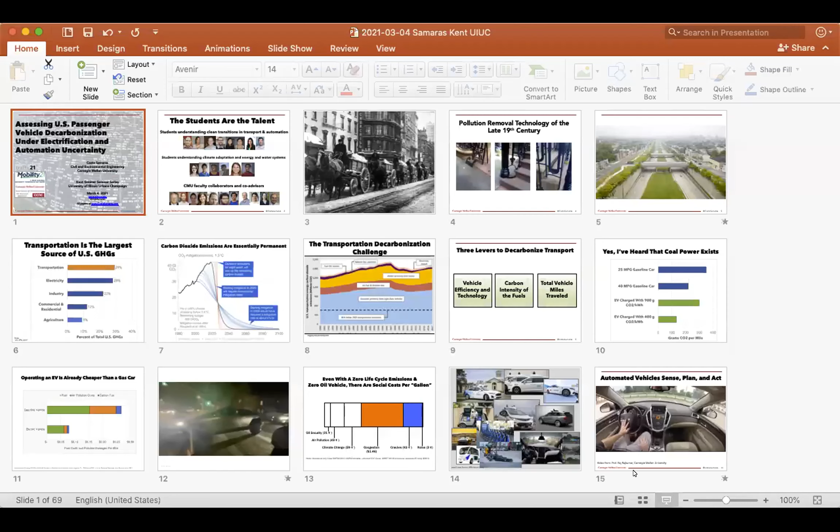So today we have 40 minutes, and I'm going to make sure that we have plenty of time for questions. I want to get through a bunch of topics because I want your feedback. We're going to talk about our work on transportation decarbonization and work that's been published. We're also going to talk about work that is very much in progress at the end of this, so I want your feedback on how things are going and what we can do better.

None of this would be possible without the amazing work of our graduate and undergraduate students that I get to work with, as well as our faculty collaborators. I work in two main areas. One is understanding the transition to a decarbonized economy in both the transportation and electric sector, and I have a great group of students I work with on that. The second focus area, which I'm not talking about today, is climate resilience for infrastructure. That's a super important topic, and I know it's important to faculty and students at UIUC, so I'd be happy to be connected offline about our work in that space.

Now, remember, transportation has evolved before, starting in recent history at the turn of the 20th century with horsepower, and with horsepower came horse manure. If you look around Chicago, New York, Boston, Philadelphia, Pittsburgh, or DC, you will see boot scrapers—basically pollution control devices—removing horse manure from your shoes, built into the built environment. So we traded this for engines that puffed leaded, carbon dioxide laden gas.

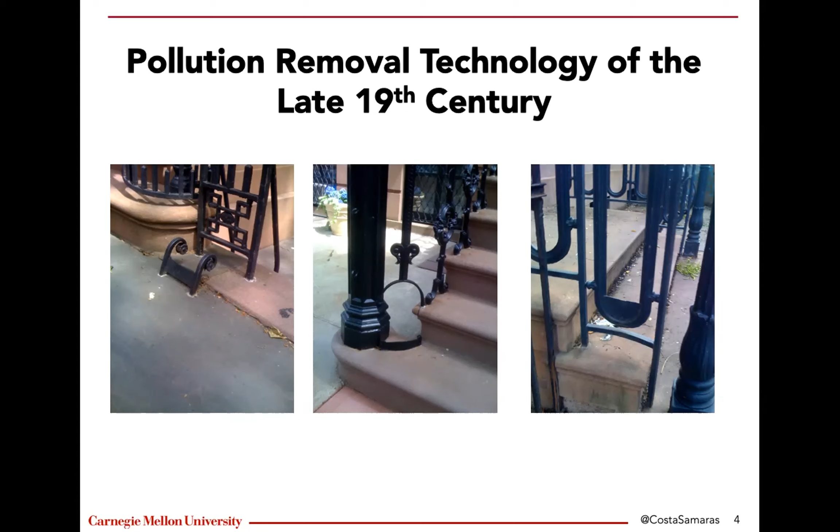We solved one problem and introduced a much bigger problem. As civil and environmental engineers, we really have to grapple with our legacy of racism in infrastructure. This is what we replaced horse and buggies with: highways that cut through neighborhoods, highways that disproportionately affected communities of color. We live with this legacy today. In this transition, you have to, as students, ensure that the next transition does not look like this one.

Transportation is a problem in greenhouse gas emissions. It's now our biggest problem—the largest source of greenhouse gas emissions in the United States. The important thing that many of you know, but I don't think the general public grasps yet, is that carbon dioxide emissions are essentially permanent. When a smokestack generating coal power turns off, the sulfur dioxide that was emitted starts to fall out of the atmosphere in a relatively short amount of time. The carbon dioxide generated from that coal power plant—unlike the air pollutants we'd be breathing in causing respiratory distress, like sulfur dioxide and particulate matter—as a greenhouse gas, stays in the atmosphere for hundreds to thousands of years or longer.

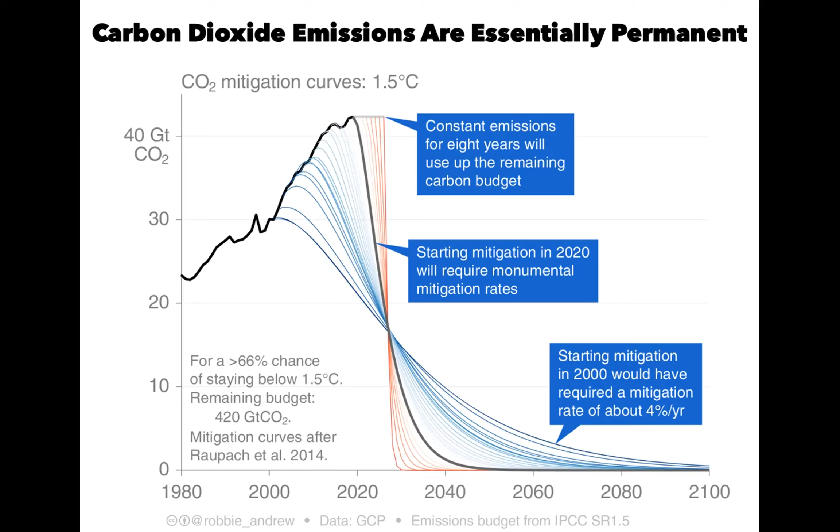Now, 80% below 2005 is not enough. It has to be down to zero. So we have to figure out how to decarbonize all of this activity.

Well, we have three things that we can do: change the technology and the vehicle efficiency, change the carbon intensity of the fuels, or change our total distance traveled, or some combination of these.

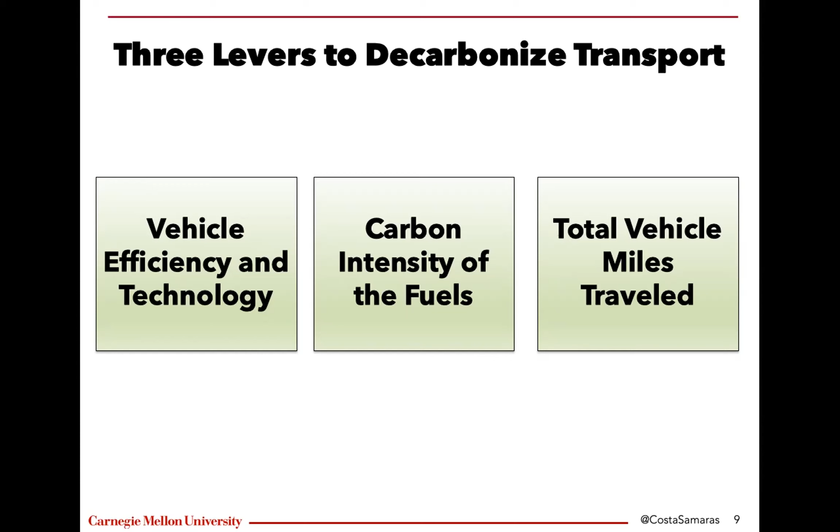Now, we've been working on vehicle electrification for a long time, and typically we'll get the response from a general audience, well, what about coal, right? So yes, coal exists. And if we are charging with 900 grams of CO2 per kilowatt hour electricity, that's kind of a modern coal plant, we are still better than a car that gets 25 miles per gallon.

Now, we're not charging with 900 grams of CO2 per kilowatt hour electricity anymore. The current US average grid is closer to 400, and better in some places, worse in other places. We'll talk about that.

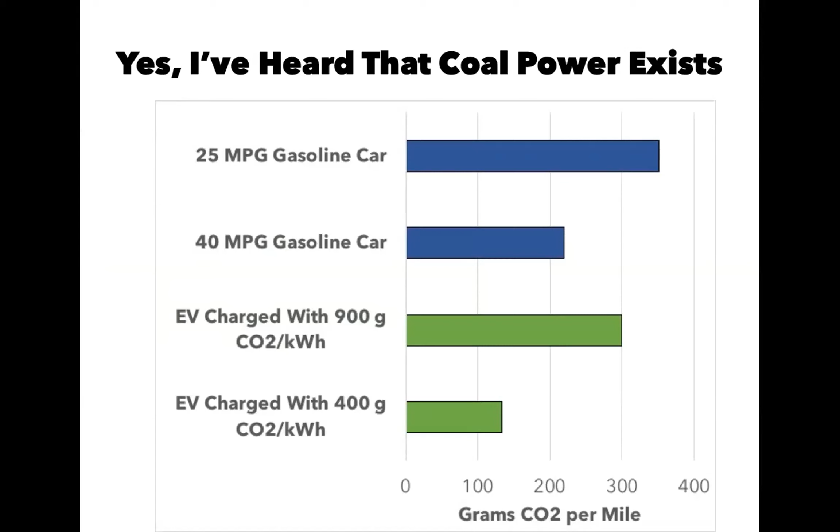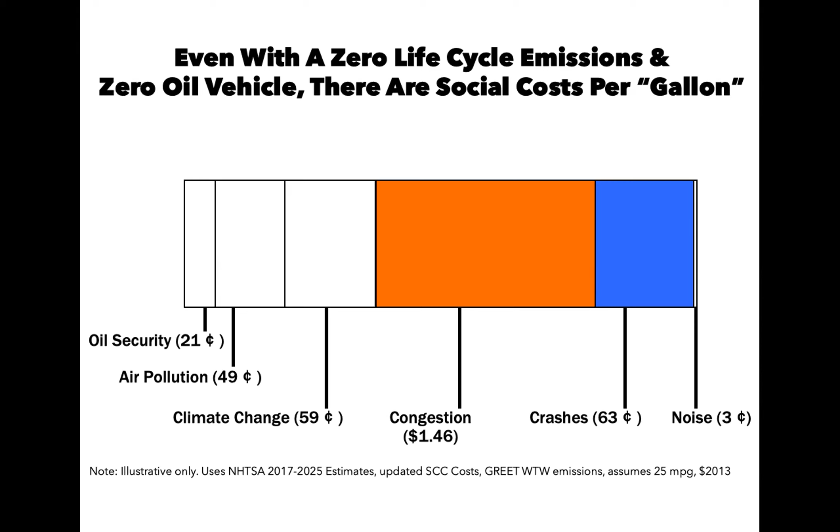So even if we had an electric vehicle charged on all renewable or low zero carbon electricity, we still have the big social damages of congestion, crashes, and noise that are generated from driving vehicles. So we have to think about reducing these and getting them to zero at the same time we're reducing our environmental externalities down to zero.

There are lots of new technologies on the horizon that potentially could help with crashes and congestion, namely the automation of vehicles, as well as the shift to micromobility and advanced public transit.

Automated vehicles are not for sale yet. This is Carnegie Mellon's automated vehicle from many years ago, and it does things that you would imagine that you'd see on videos for automated vehicles at UIUC or other places. You program it to where you want to go, and it goes where you want to go. And a vehicle like this can actually cross the country.

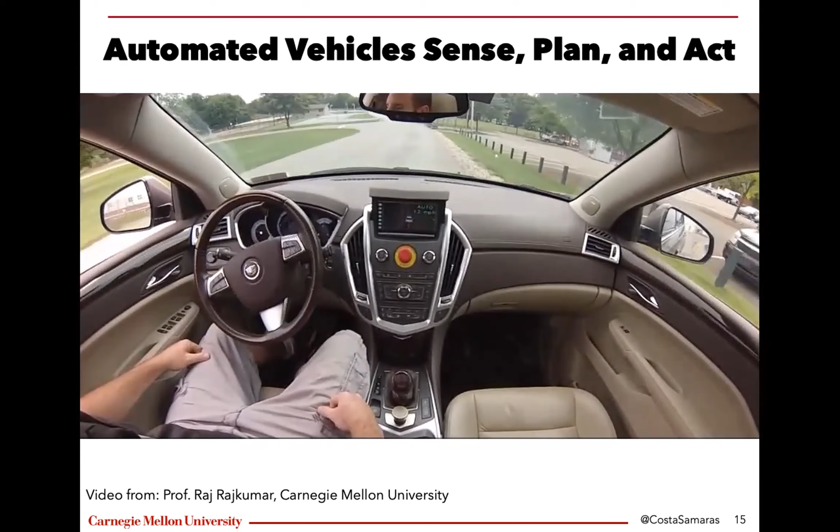with relative safety, as long as there's a person completely alert, ready to smash that big red button when something goes wrong. So these vehicles are not yet for sale, but are they going to be for sale this year? No. Next year, probably not. But maybe through the end of the decade, maybe the beginning of the following decade, we'll see how things go.

Eventually, these are going to start affecting energy use in a couple different ways, which we'll talk about. Now, just for safety's sake, if you have a Tesla, that's great. You do not own an automated vehicle, not at all. You have a partially automated vehicle, a level 2 automated vehicle, and please do not treat it otherwise, because the vehicles for sale right now require your full attention the entire time that you're driving them.

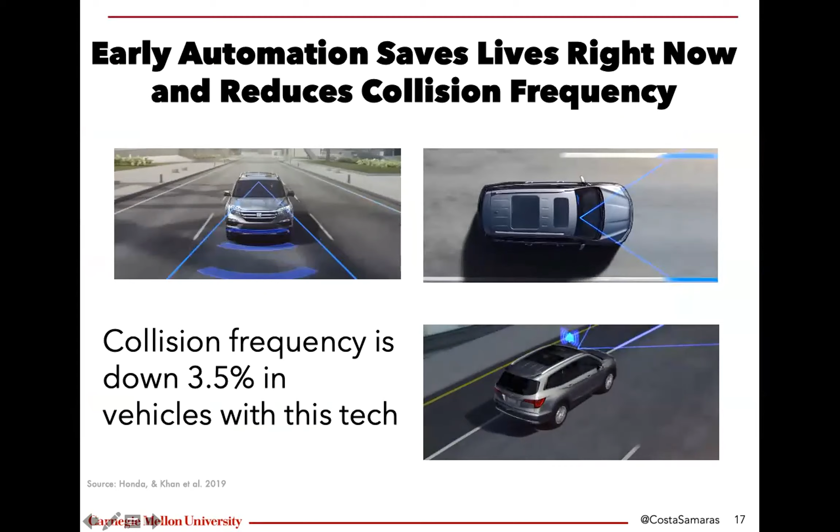But what they do enable is collision frequency and severity reductions with different technologies: lane departure warning with active lane keeping, crash avoidance with active braking, and blind spot monitoring with active avoidance. So Professor Corey Harper at Carnegie Mellon and us and others have published on how these early automated features can help save energy uses associated with crashes.

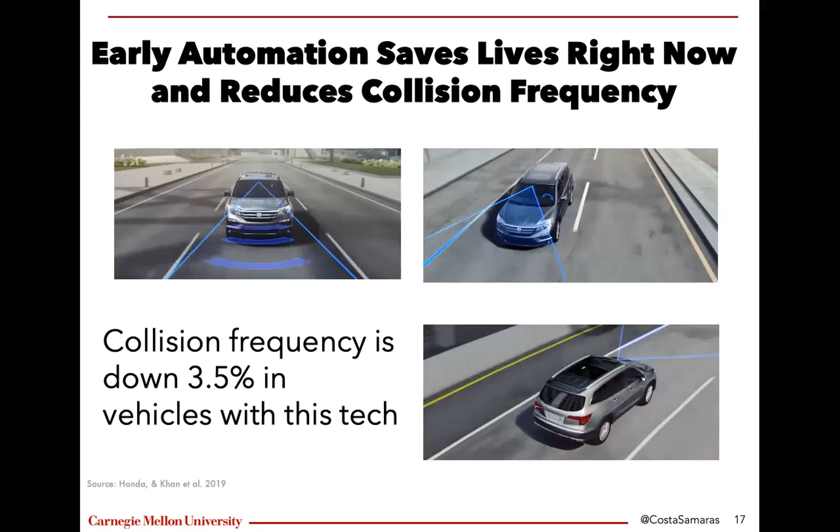Now, if you're going to go buy a vehicle, buy the cleanest you can, buy electric if you can, and please buy the safety package, because this is really instrumental in starting to bend the crash curve in vehicle driving.

Now, we have a whole bunch of work that's ongoing in this area. I'm going to just give the titles of what's happening and mention and show a couple of the students that have been working on this.

These are some of the factors that go into how we model the energy and environmental implications of a future transportation fleet. So how do people use these vehicles? How do they affect energy use? Are they going to be high density urban pods, or are you going to travel from UIUC to Chicago watching Netflix, or even better, traveling from UIUC to Indianapolis or Pittsburgh, kind of sleeping?

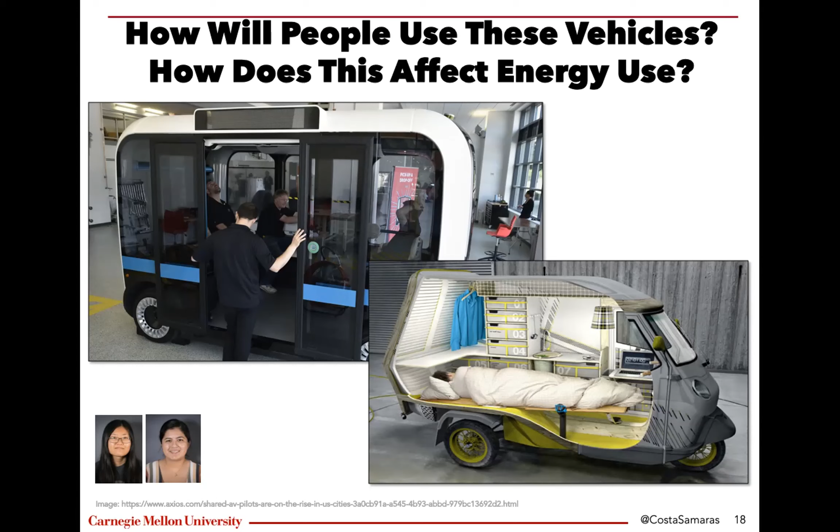These are different travel modes. They might extend the commute range if people are not having to drive, or they might enable kind of dense urban shareable networks. Will these cars be owned or will they be shared? Also super important, and how will they affect equity?

Will automated vehicles enable additional transit service through shuttles or purpose-shared automated vehicles to communities—this happens to be Pittsburgh—communities around cities that don't have as dense a network of transit as the urban core does. These are all things that our students are investigating.

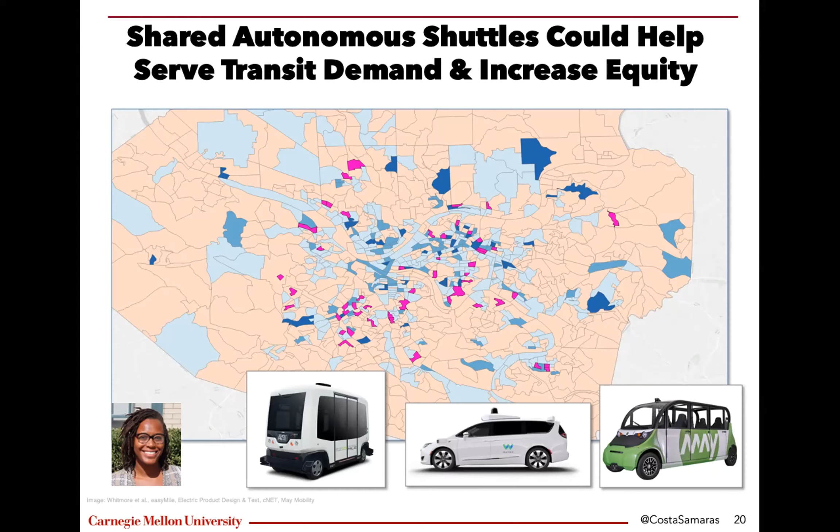When you look at this, vehicle efficiency and technology could get better as we electrify and as we automate. We and others have done papers on how early automation is going to improve the fuel economy of driving. But some of our colleagues have done papers on how automation might increase the total amount of energy use per mile if the sensors, cameras, and computing equipment start to erode the driving range of a traditional electric vehicle.

Now, the carbon intensity of the fuels—here we're talking just about electrification—so we're hoping that continues to go down, and we expect that it will. But the real big wild card here is the total vehicle miles traveled. How will automated vehicles affect total vehicle miles traveled in communities around the country and around the world? Really, we do not have an idea with this. We don't have a great sense of what this is going to look like. We can model it, but we won't know until this actually starts to roll out.

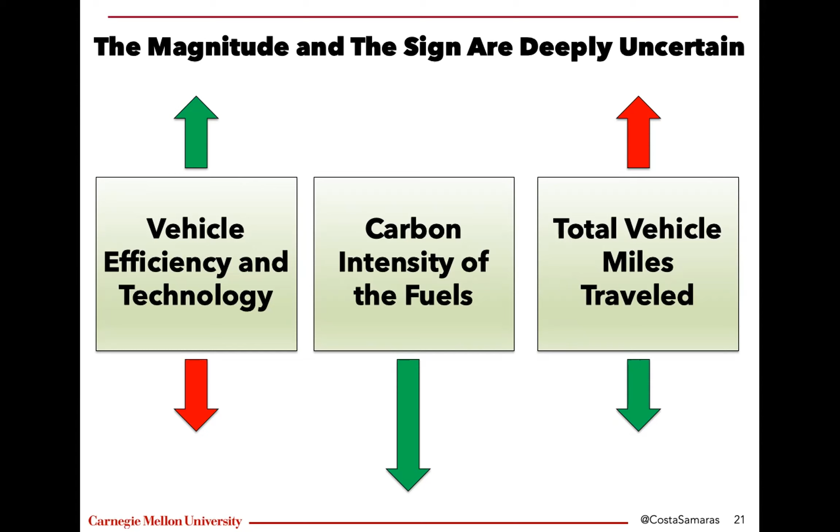So there's all this uncertainty around the future passenger transportation system that we would need to model in order to make some understanding and policy pronouncements about where we should go and what we should do next. We incorporate these and others into a robust decision model.

Now, robust decision making is a method that came out of the RAND Corporation and some of our mentors there. This slide is from Dr. Jordan Fischbach, but I like it because it tells us the difference between what we normally do, which is try to imagine a couple scenarios, and then under those scenarios, what are the policies and infrastructure that will get us to be successful under those specific scenarios. So that's a predict then act approach.

And that we don't think is good enough for something that is subject to such deep uncertainty like the future of transportation, because of all the factors that we've been talking about. So what a robust decision-making process does is basically model every proposed strategy and identify the vulnerabilities of that strategy. That strategy might be requiring electric vehicles by a certain date.

That strategy might be subsidizing automated vehicles in the dense urban core. The strategy might be some high pollution externality on fuels. Then we're identifying how well those strategies get us towards some threshold.

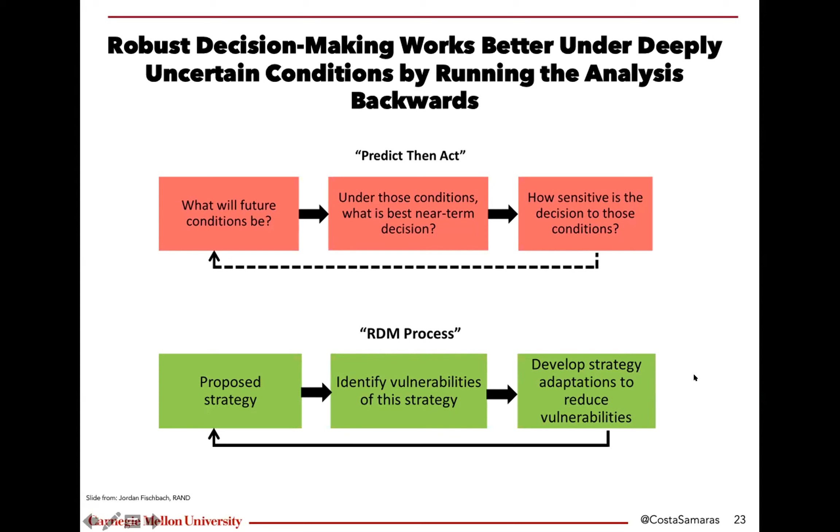Let me talk a little bit about what that means, and we'll get to some results. So in this first piece that we've done, our goal, our threshold here, is to reduce CO2 from the light duty vehicle sector by between 80 and 100%. That means that we have a CO2 threshold in 2050 of 250 million metric tons.

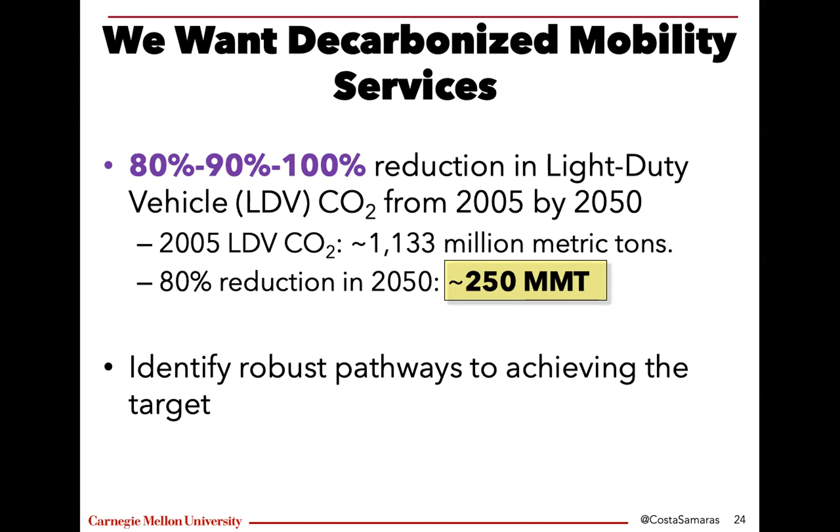So that's the goal in 2050 that we're trying to get to. Now, this is just the 2050 number. In this first paper, we were doing it annual through 2050. In the work we have ongoing, we're looking at an entire carbon budget. And there's a difference in strategy when you're trying to be 80% or 90% below a target in 2050 versus spending down an entire carbon budget. So I'm going to talk just about the annual number here.

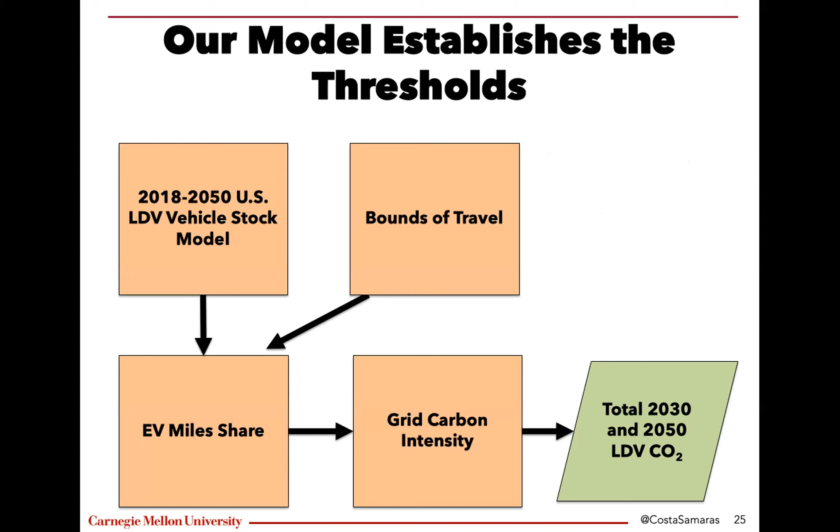The important thing here is that there are a whole bunch of correlated factors we need to make sure we're developing internally consistent pathways for. You probably aren't going to have a sample year where total vehicle sales are really, really high but the economy is in a recession, or where vehicle mile travel growth is really high when the economy is in recession, right? So we have to think about adjusting the scenarios to make sure the signs are at least aligned.

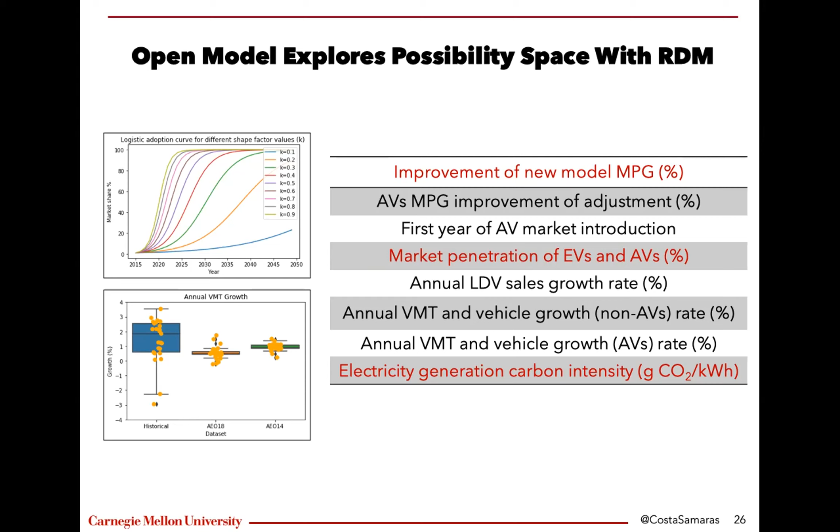And then we're modeling across the broad range of future improvements on AV adoption, year of AV market introduction, EV adoption, EV policy and sales restrictions, and how the grid changes. So we're trying to model all the different ways that might affect our outcome, which is CO2 in the transportation sector by 2050. So here's the kind of base case we can talk through.

And we're going from close to 0 electric miles now, a couple percent. As the electric sector moves away from 0—so maybe we do a really good job in decarbonization, but instead of getting down to 0, which is a very low number as our colleagues would say, now it's at 100. So 100 grams of CO2 per kilowatt hour is great, it's not 0 though. So at 100, we're going to need more than 90% electrified miles, right?

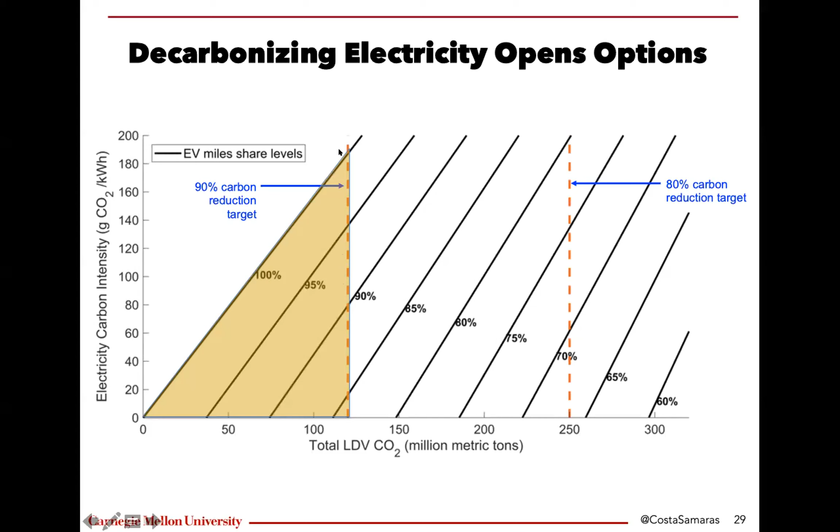And as we move all the way up to 200, now we're basically going to need very close to 100% electrified miles. Now this was under traditional projections of how far we travel.

And so this is where the automation piece starts to come into play. The way automation comes into our analysis is, number one, how far we travel. And number two, underlying all this, is how it affects the efficiency of vehicles. So here is how far we travel.

Now, you all are in transportation, and you'll be very familiar with VMT trends, vehicle mile travel trends, or vehicle distance traveled trends in the United States and around the world. And we travel a lot—3,000 billion miles in transportation annually in the United States, 3 trillion miles.

And what if automation starts to open up travel possibilities and induce additional demand that we haven't even thought about yet? And we do not put any policies in place to encourage dense development, as well as ride sharing or vehicle miles traveled fees, other ways that we might discourage the use of additional driving.

If we don't address this, and we go from 3,000 billion miles to 4,000 or 5,000 billion miles of total VMT per year, the amount of electric vehicles you need to still meet your target really goes up to 100% very fast. And that's also assuming our electricity sector is decarbonizing separately. Under a zero-carbon electricity sector, which is where we need to be, under a traditional model of travel, we're going to need, as I mentioned, 84% EV miles in the system.

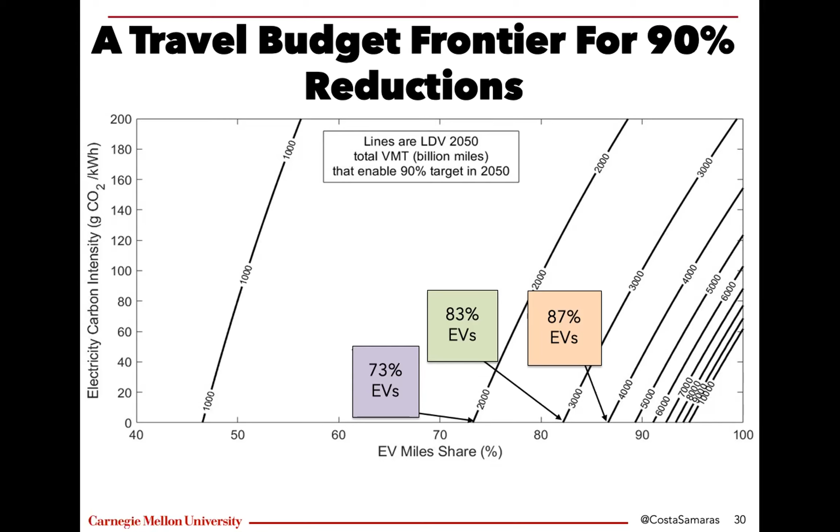So as we travel more, we'll need more electric vehicles and more electricity decarbonization. But as we potentially travel less, you need fewer. So the equation goes both ways: reductions in travel reduce the total number of EV miles you need in the fleet to meet a specific 90% target.

Now, what about changing load factors and encouraging sharing? Stuff that we definitely should be doing. Here's our current load factor, around 1.6 people per trip. If we're able to move that load factor above 2, towards 2.5, now all of a sudden we're able to approach our CO2 targets by having fewer EVs. That's good, and we should be doing that.

But the thing that really struck me about our results is, if you're able to get to 100% EVs with very, very low CO2, you're basically doubling or tripling the benefit of additional sharing. So we need to do all of this — we need sharing — but really, it makes intuitive sense. A largely decarbonized electric sector running most, if not all, EVs will have a big CO2 reduction relative to the status quo.

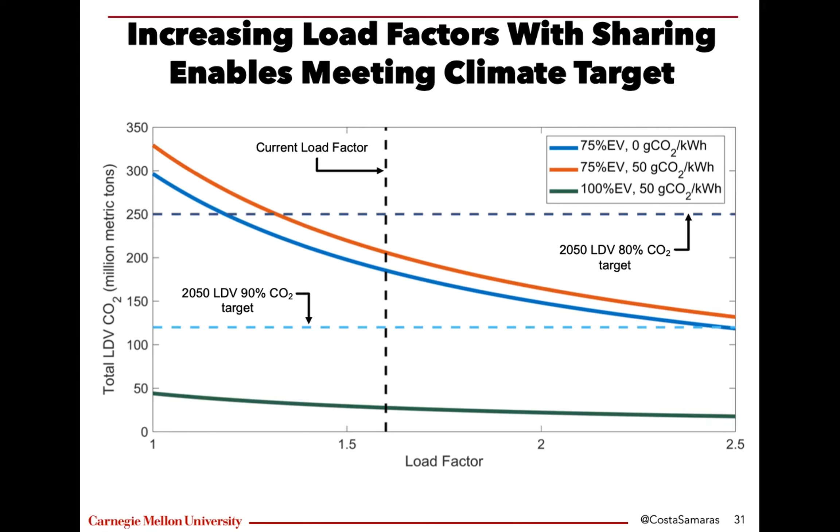Now, let's think about what our travel budget frontier could look like for enabling a very, very low-carbon passenger transport sector. So I mentioned that we do 3,000 billion miles, and two-thirds of our VMT are in urbanized areas.

Now, UIUC is probably an urbanized area. Outside of Pittsburgh is probably an urbanized area. There are urbanized areas, according to DOT, that may or may not look like what you'd think of as urbanized, but they're within an urbanized region. Still, if two-thirds of our VMT is within urbanized areas, we have opportunities to make considerable reductions through active transportation, public transportation, and micromobility.

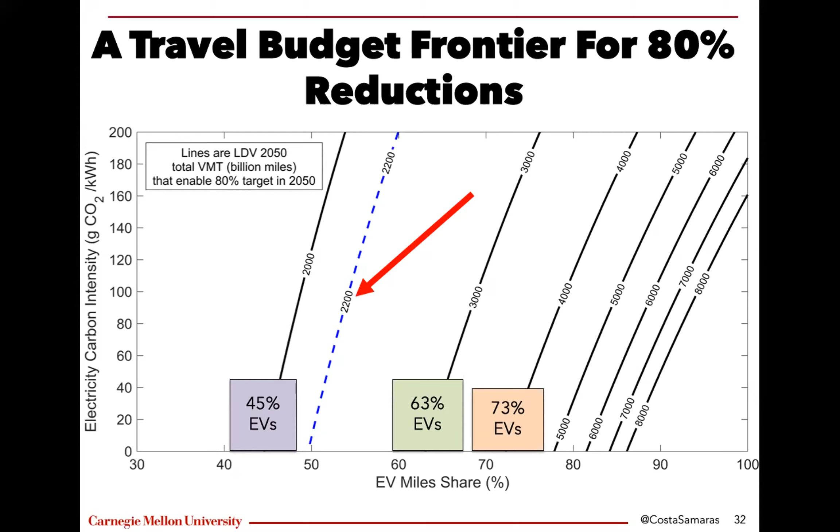Now, this is the scale we're dealing with here. To jump from 3,000 down to 2,200 or thereabout, this is all of the urban vehicle miles traveled in the 10 most populous states. So there is a chunk of VMT that can be reduced in these areas, which reduces the total number of EVs we'd need in the fleet to meet our decarbonization goals. Fewer VMT, fewer total EVs needed. More VMT, we need more EVs in the fleet to meet decarbonization goals.

Now, the problem is EVs and vehicles themselves are not phones — we don't throw these away every few years. People sell them, but then they enter the secondary market and are driven for many more years. The average age of a vehicle is 12 to 15 years, and the tail of this distribution can go into the 20s and even up to 30 years.

So we modeled a range of how the fleet would evolve given sales, exits, and fleet age, and also, not shown here, some work around what COVID did to auto sales. We found that if we wanted 100% electric vehicles in the United States, we would have had to sell only electric vehicles starting in the year 2020 — which would be impressive, because we'd need a time machine to go back and require that, then start selling only EVs.

So we will not age out the current gasoline fleet by 2050 without some additional policy. A vehicle sold in 2021 has a decent chance of being on the road in 2041, maybe even 2050. However, we could still meet our bounds of decarbonization — a lower bound of 40% electric to an upper bound of 60 to 80% electric — even if we did limited policy and waited until the early 2030s to require only EVs.

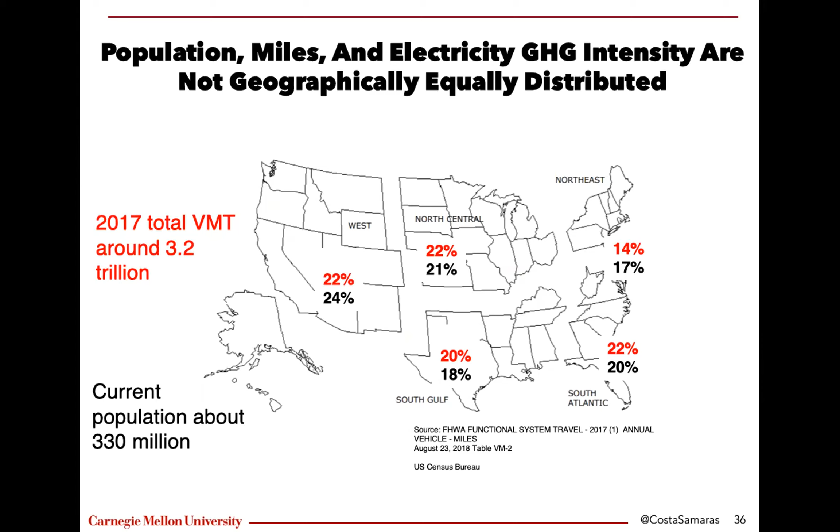We know that different parts of the country have different VMT and population. California cannot do this all themselves. We're going to have to make sure that this is a nationwide strategy of decarbonization and electric vehicle and public transit and active transportation rollout.

We also know that electricity is not a single grid across the United States, as we keep the folks in Texas in our hearts and minds after what they've suffered through this last month. But electric sector decarbonization continues apace across all regions, even the Midwest, where it had been traditionally coal heavy.

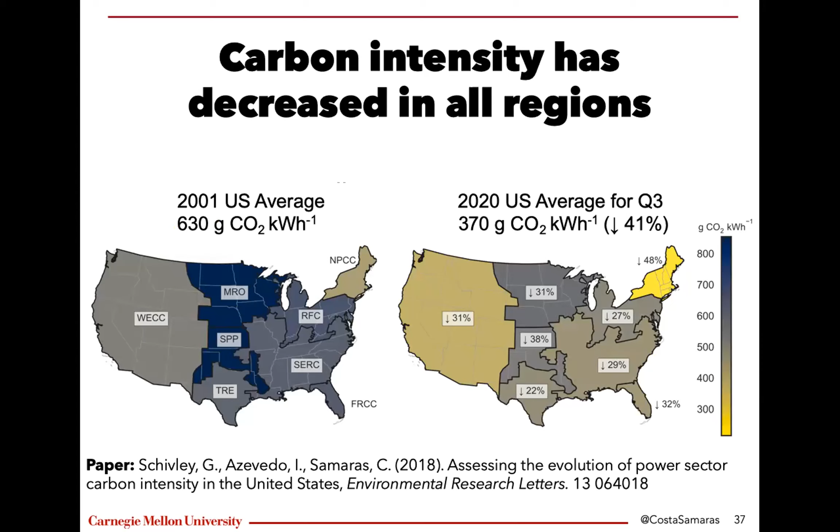And as we continue to track that, we do this on our research website, emissionsindex.org, where you can take a look at how the carbon intensity of the power sector is changing, and all the code and data is there.

What we didn't talk about here is the life cycle emissions, which we work a lot in. Making batteries, making vehicles, making fuels, all this creates emissions. This requires the concurrent decarbonization of the electric sector as well as the industrial sector, so that we have the lowest possible carbon material inputs to a pulse of 50 to 200 million electric vehicles just in the United States that we would need by 2050.

Now, this paper basically said, hey, you want to decarbonize, you have to get your electric sector close to zero, and you have to have most electric miles by the middle of the century, kind of 67 to 84% as the minimum targets here.

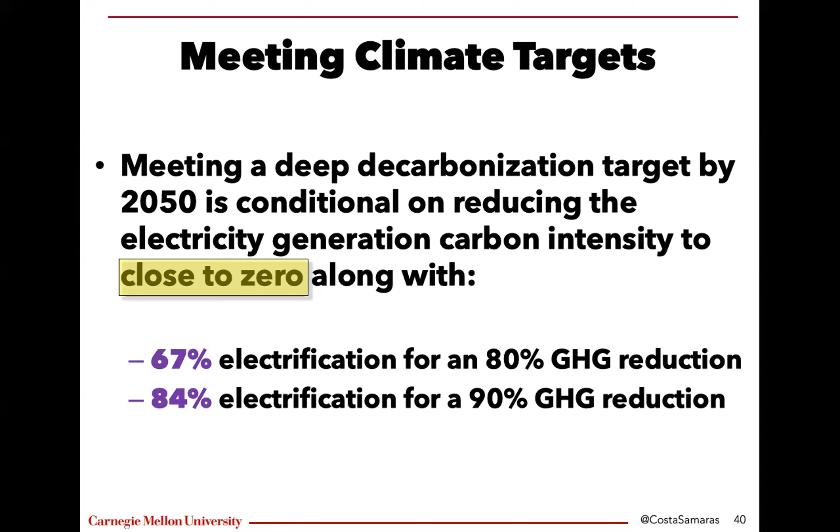This requires a lot of EVs. It also requires lots of public transportation and lots of active transportation in order to make this work. And lots, I mean, more than you ever would have imagined that you would need is what we need. And we're going to do it. We have a pathway. It's going to happen. The challenge now is taking action that is consistent with the scale of the challenge.

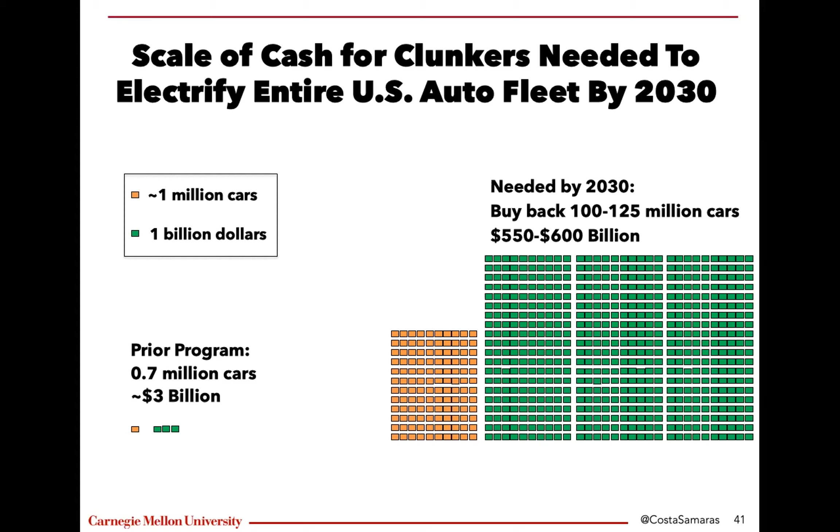I'll mention that our previous Cash for Clunkers program bought back 700,000 cars and cost $3 billion. If we only sold EVs starting in 2021, by 2030 there'd still be 100 million gasoline vehicles on the road. If you wanted to buy all those back, it would be $550 to $600 billion. And if we didn't do that, those vehicles would likely be on the road for a decade or more after that. So: electrify everything, clean the grid, and move more while driving less.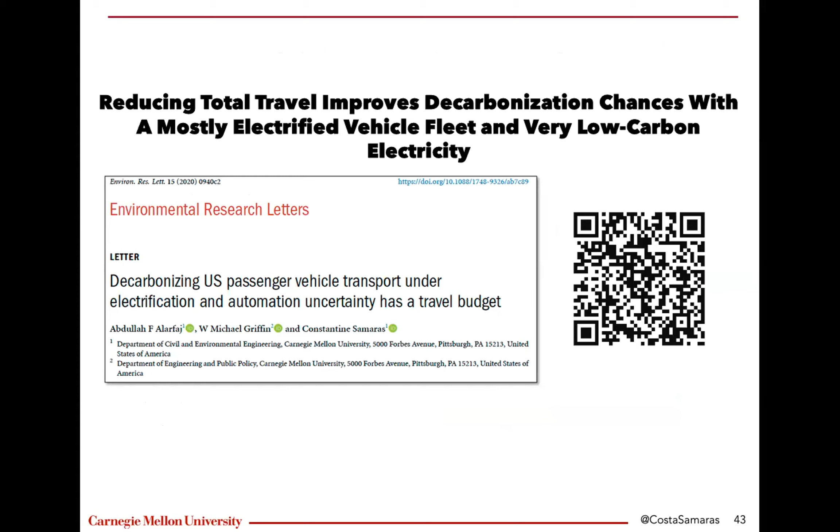I want to move now to this second piece because I know we're getting towards the end here, but this is the in-progress work.

The pandemic has affected the way that people get stuff, but even before the pandemic, there were 1.5 million packages being delivered in New York City alone every day. We said, hey, you know what? Let's go figure this out.

If people are going to deliver stuff by drones, let's go get the energy use. We and others had published papers about simulating energy use in drones, but we were more interested in let's go build a drone. So here's a little hover test. Drones take off, make sure that the propellers work well.

We put a sensor box on it. The students 3D printed a box. We put an anemometer on here, and a whole bunch of students and faculty worked on this project—the project that I lead, Department of Energy funded, on understanding the future of delivery with different types of robots. I'm very grateful for all the students that have been working on this, and our colleagues in the Robotics Institute.

So we built a drone. We then started doing some first principles energy models of drones. These are small quadcopter drones. Unlike the helicopter industry, there's not a robust industry for doing CFD and first principles analysis on drones. We started that a little bit and tried to think about how do we model the energy use of this and compare it to the sensors that we're going to put on here.

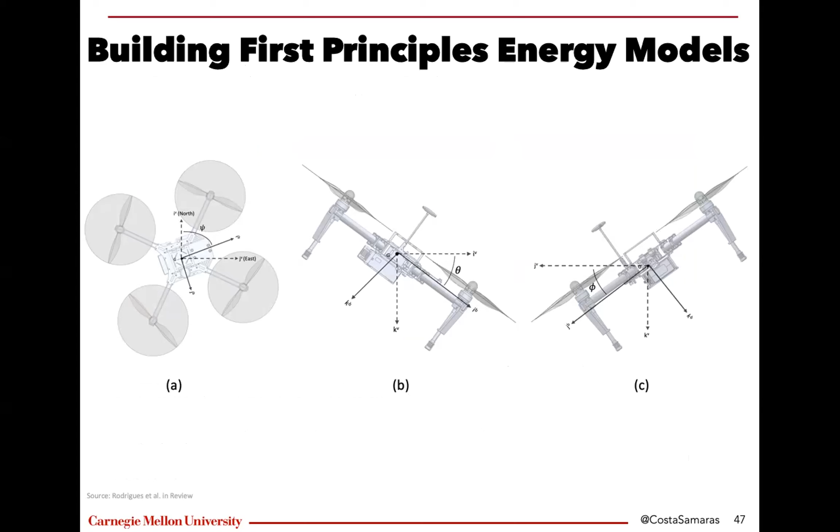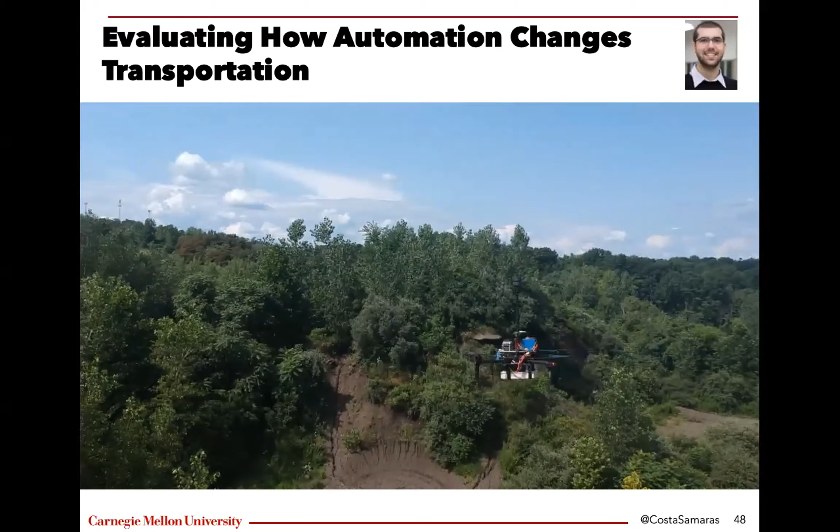We put this stuff together. You see a little package underneath there—it's about 0.5 kilogram. We flew 200 plus sorties at different speeds and altitudes and ranges, on a fixed course outside of Pittsburgh, and collected a whole bunch of high resolution data on what happens when you fly a package with a drone.

The data that we collected is power, altitude, speed, time, and wind measurements, position—a whole bunch of pretty high resolution information that we're now sorting through and figuring out what to do with. We have a data set that is public already, published on Figshare, and we have a bunch of papers in the works on assessing what all this means for transportation and for decarbonization.

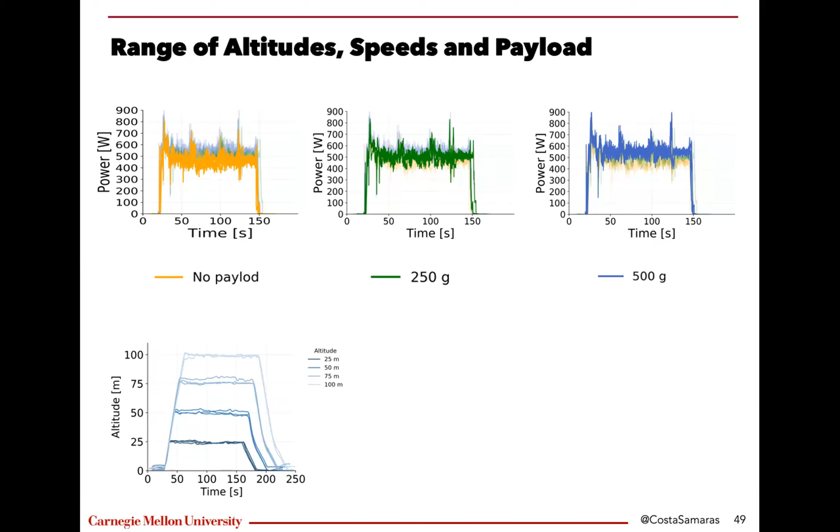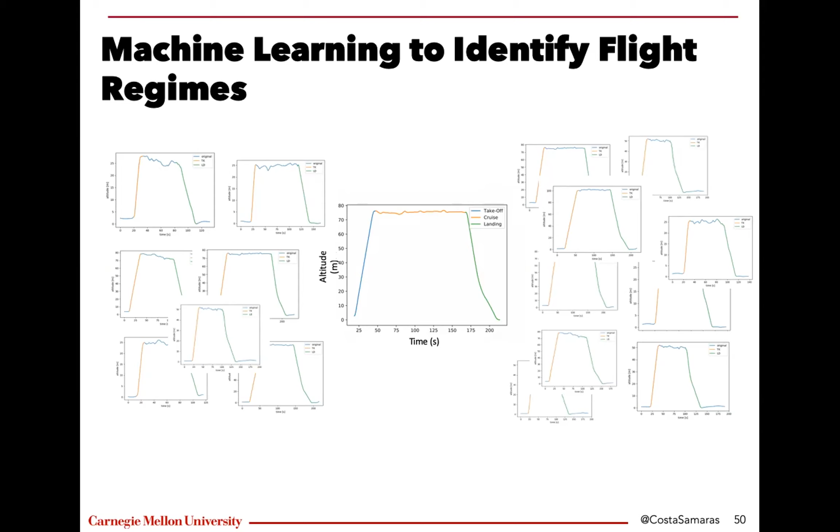The thing that one of the students who led this, Thiago Rodrigues, came up with: if you look at all the sorties, the quadcopter goes up, flies for a while, and then goes down. There are different forces and energy requirements happening in these three regimes—the takeoff, the cruise, and the landing. What Thiago developed was a machine learning algorithm to identify these portions of all the flights, so we can run all the flights through this algorithm and say, this is a takeoff, this is a cruise, this is a landing.

We can start to model across all of our flights the impact of weight, the impact of distance, the impact of speed. As one would imagine, a heavier package and a heavier drone are going to require more energy use. This is watt hours per package, and this is a two-way delivery distance—so if it's 4 kilometers out, 4 kilometers back, except when you're going out you use more energy than when you're coming back, because you've dropped off the package.

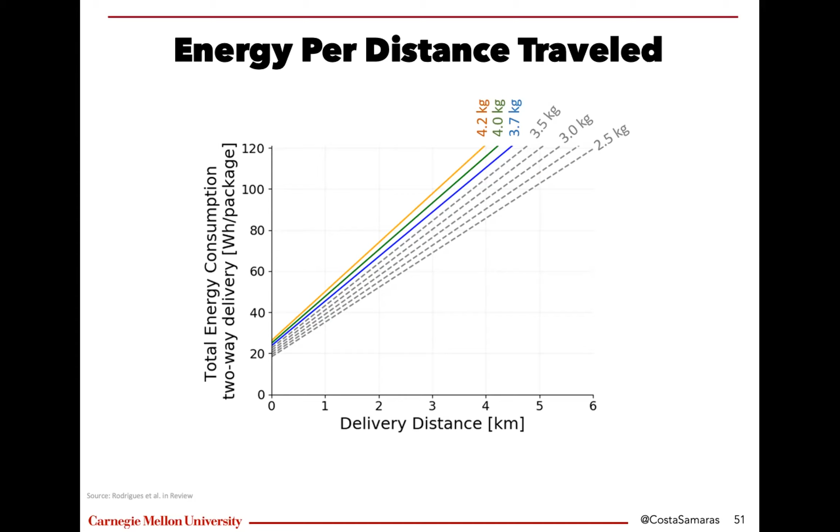Obviously weight of package is part of this, but speed is really important. A slow drone uses more energy because it spends more time in the air, and this is relevant for urban policy, because you might not want drones at all. You might want some drones, but you don't want them to go too fast—it might be noisy. As you think about optimizing drone delivery policy, we're trying to make sure it's safe, that it's equitable, and it has the lowest possible environmental footprint. A slower drone is going to use more energy because of more time in the air.

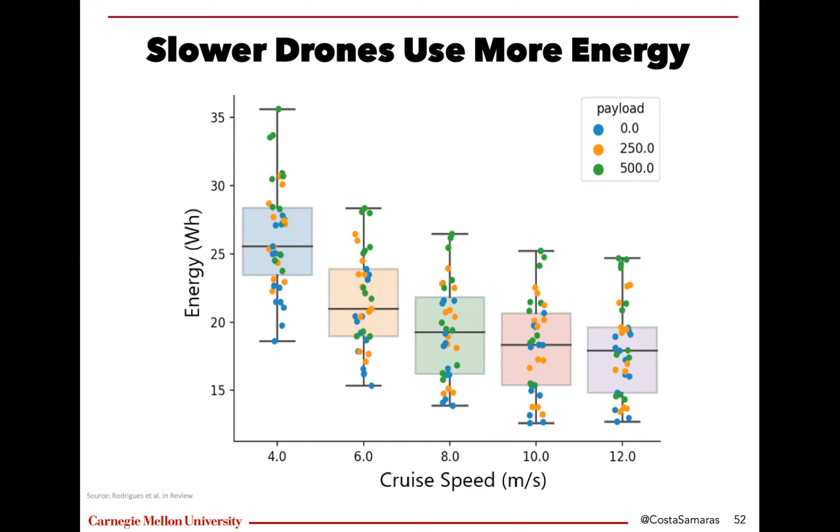So these are the differences in payload across cruise speed. This is the graph of a slow drone versus a fast drone, and the uncertainty is how heavy the package is. It's interesting that with a slower drone, you basically top out with a battery—you can't get it to go that far because you use up all the battery's energy.

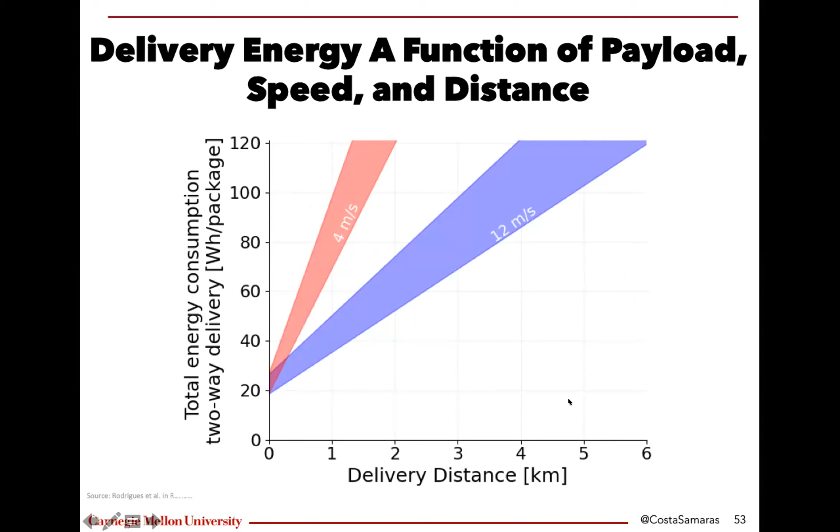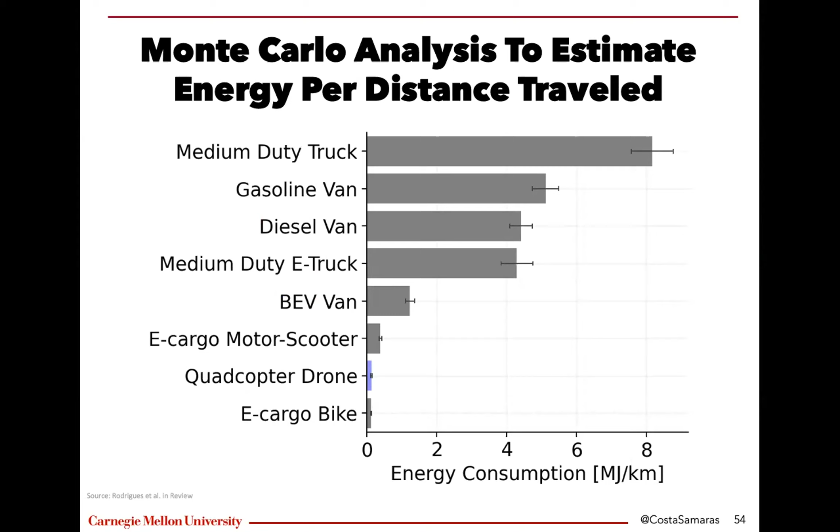We did a Monte Carlo assessment to understand the difference between drones and other last mile delivery services—truck, bike, van, etc. On a megajoule per kilometer basis, yes, a small plastic drone uses less megajoules than a several-ton steel truck, but you have to think about getting this to a per-package volume. This is where the uncertainty analysis is really important, because there are all kinds of assumptions embedded in here about the volume of the cargo space, the delivery route, the types of packages, the weights of packages. Still, this is in progress, hasn't been reviewed yet, and there's other similar work out there that agrees: quadcopter drones, electric vans, and e-cargo bikes live towards the bottom of this energy-use-per-package pyramid.

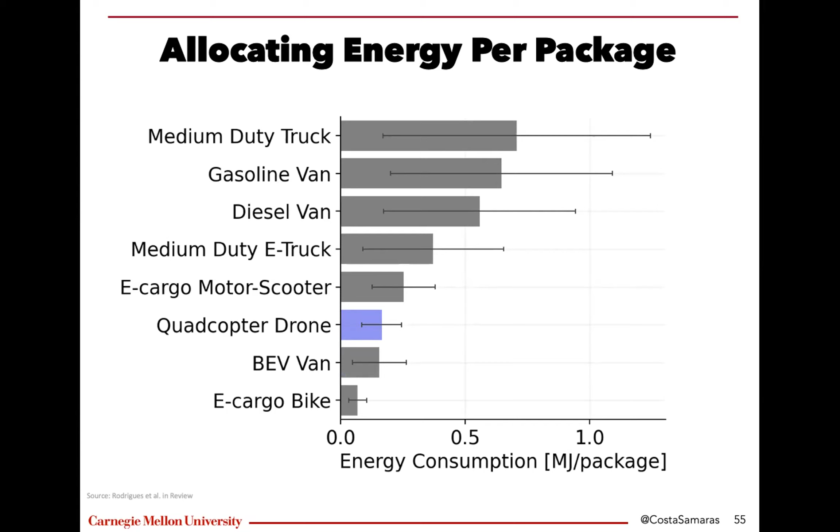And the more packages that we can get out of diesel vans and into electric and non-motorized or limited motorized modes, the better we'll have on a total megajoule per package basis. Now, you're not going to be able to deliver pet food with a drone. These are small packages, high value items, iPhones,

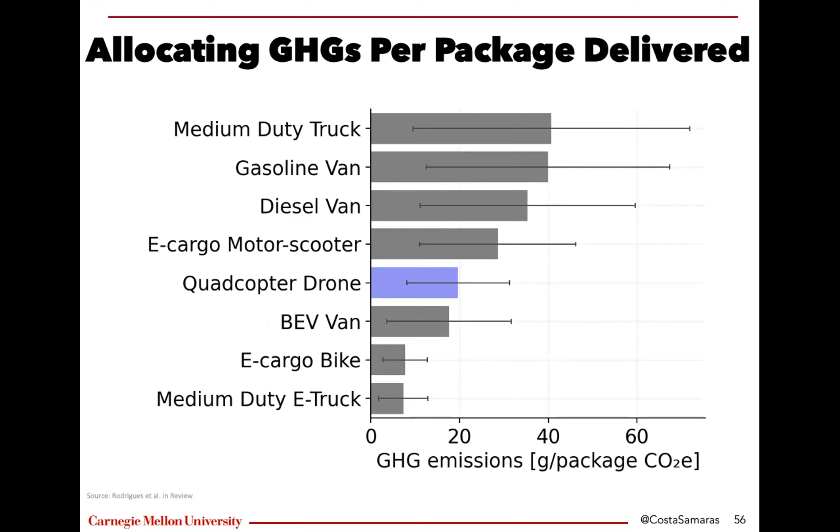microphones, USB sticks, things we might need for our Zoom life right now. Now we can do the same thing with greenhouse gases on a per package basis. And you see that quadcopter drones still are competitive with some of the more eco-friendly modes. You'll see medium duty e-truck here. If we can get an electric truck or an electric van packed with

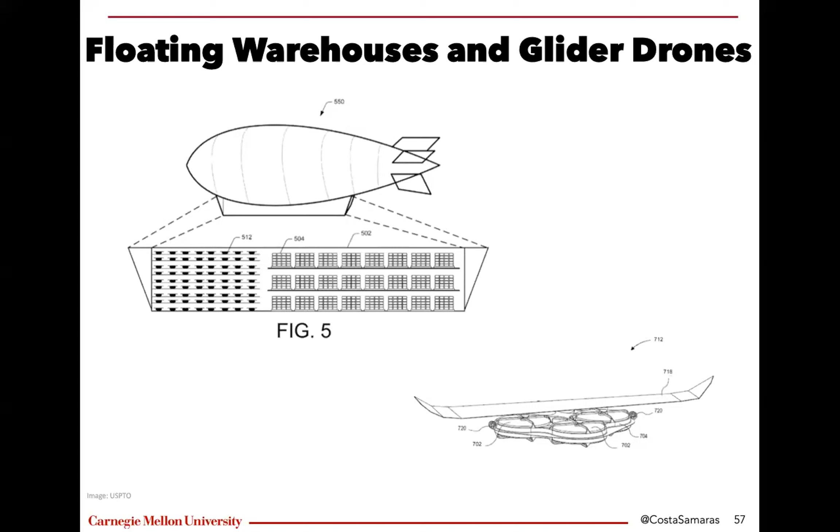packages, that's going to be one of our most efficient modes to get stuff on the last mile. Now, why this is important is that this is from Amazon's patent filing of a floating warehouse where they can potentially send a package down to you in a glider drone. Many of the package delivery companies are experimenting with drones to increase the amount of packages they can deliver within a time frame to get them out really fast, as well as potentially in rural areas to increase the efficiency of having to drive a diesel truck from house to house to house. So the drones are not going to replace a large portion of freight, but there are opportunities that they replace some, and we're trying to investigate what the total energy and greenhouse gas emissions are from those.

Now, we also have in the works, sidewalk robots. I know this is a little bit loud. This is our sidewalk robot rolling around Carnegie Mellon's campus. Both the drone and our sidewalk robot are autonomous, and we want to make sure that we're able to measure the energy of both the vehicle and the autonomous brain itself. And we're doing that with this robot.

So what are some robust policies for decarbonization? There's wide uncertainty, but there are synergies between electrification, automation, and travel reduction. Shared rides and early electrification are really important, and they open up options for later. But really, travel reduction is a no regrets policy that allows decarbonization to continue amidst the rest of some of this uncertainty. And as we've seen now, drones can potentially reduce energy and greenhouse gas emissions per package on some

routes, but there's going to be other social equity and environmental concerns around automated delivery that we and others are experimenting with. And I will say, on the drone side, we're pretty excited about some relationships that we're finding between energy and package delivery and the characteristics of drones. I was debating whether to put it on this slideshow yet or not. I wanted to kind of marinate a little bit more to make sure that we're doing it right. But we think that there's a generalizable relationship that we can potentially use across different types of and sizes of drones. I'll report back on that and tell you how that's going.

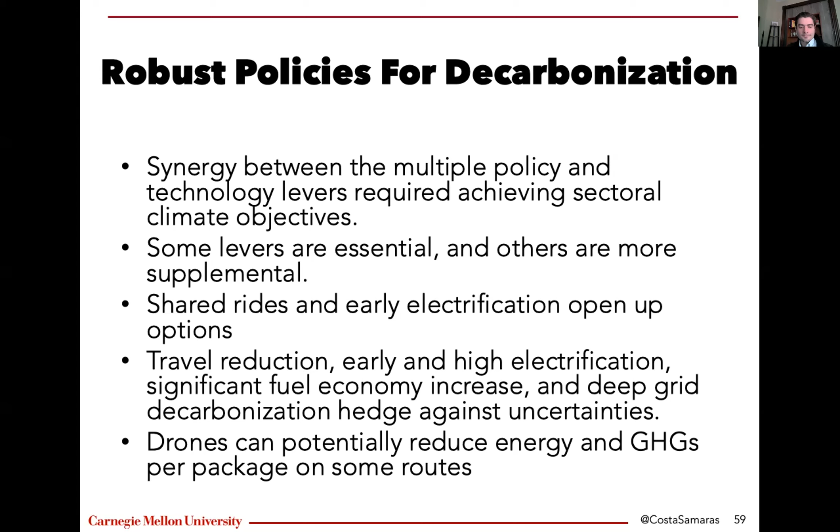It's not going to be nuclear power plants worth, and we kind of have an understanding of what the hotel loads are of a normal electric vehicle, the non-motive loads, and we can create a range of well, we think it's going to be between here and here. That's just one element that the model is going to sample from in order to come up with a region. All of these little ranges add up to bigger ranges that help us understand where the big uncertainties are.

And it might be that little elements of this don't affect the answer in a big way, and we can not worry about the uncertainty, or we figure out these really affect the energy in a big way, and we want to push on those to make those more efficient.

Yeah, because I was curious because you showed us a bunch of scenarios or strategies, right? Which one is robust, which one is good, and which one is the bad strategies. So yeah.